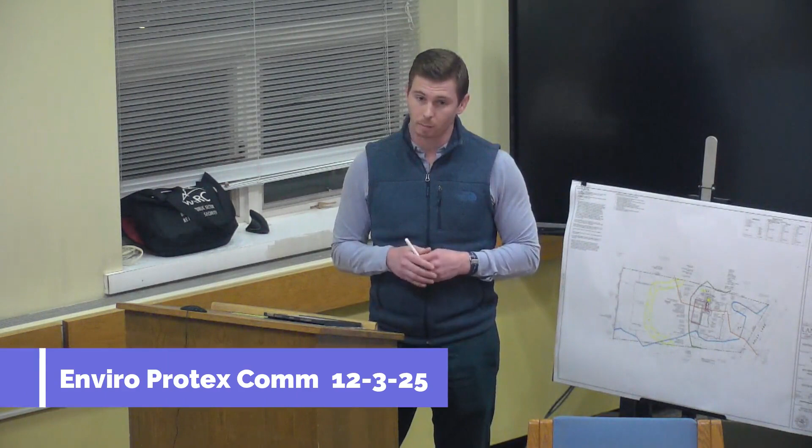That'll allow construction access off the end of the driveway here to come in easily through here, and then ultimately a new underground propane tank will be buried and installed. It'll maintain all of the regulated setbacks from a building code, zoning code perspective. This will allow free access here, and basically they're going to start on this side of the development and then work their way out. Doesn't require any access, certainly not through the wetlands.

There'll be a double row silt fence installed, fully sectioning off those portions of the wetlands throughout construction, and then they'll work their way out. The stockpile was also relocated from the south. If you'll see between the two plans, it's shown in this area here. So what'll happen is they'll come in, dig the excavation for the pool foundation, and stockpile that material in this area, which is just a lawn stepping stone walkway now.

They'll reuse what they need in the backfill, and then that'll all be trucked off the site. So beyond the first, big excavation for the pool foundation, there's really not much for stockpiling that will be on the site. So we think that was a big improvement, as well as tightening this thing up as much as we can.

For drainage, we're providing that drainage all in kind. As Rick mentioned, the previous application before us was moving drainage into the front here and causing more disturbance. We're keeping this all kind of point source treatment in kind. Essentially what you're going to have is just stone and pipe. There'll be perforated PVC pipe, connected up as a manifold. Within that, there's a series of channel drains within the patio that will collect that and recharge it into the ground through the stone and the perforated piping.

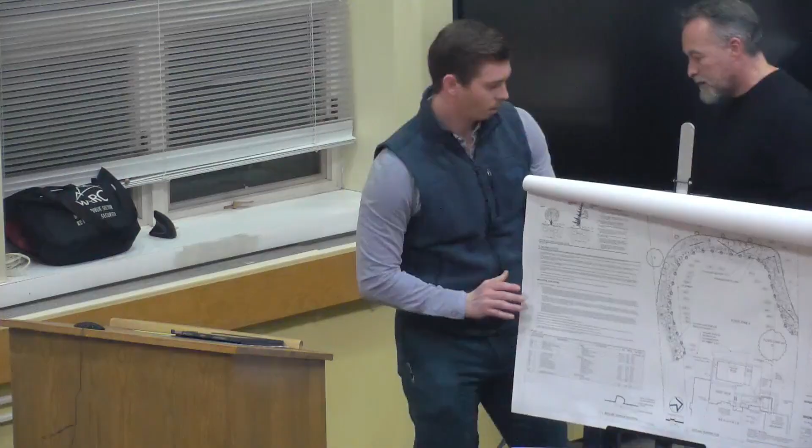Good evening. My name is John DeMail. I'm a landscape architect.

As Kurt and Rick had mentioned, as mitigation, we are taking a huge amount of existing lawn area, roughly about 15 feet wide, and mitigating it with true native plantings, edging that area with boulders placed within 8 feet of each other.

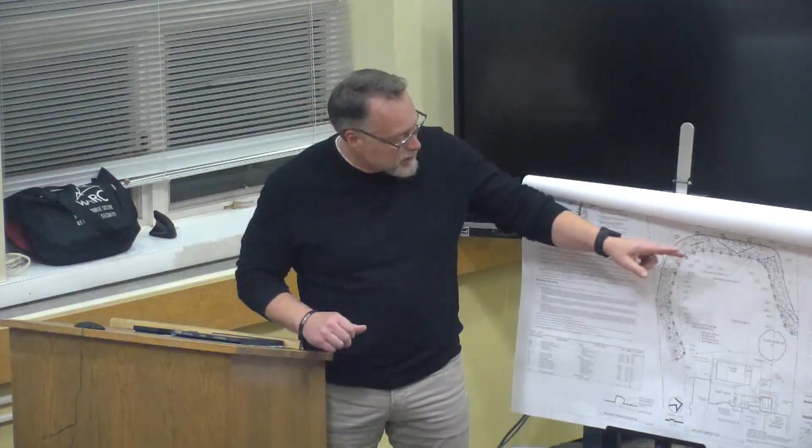The plantings consist of fir, dogwoods, bayberry, viburnum, and basically a lot of the plants that native animals forage on and live within. We included some fir also along the edge here, which might act as screening to the neighbors, but it also adds an evergreen material for the plants, for the animals to live within as well.

Currently the existing lawn area extends all the way to the back side of this dark area, which you're seeing in this drawing here. There were some boulders placed there originally as part of probably the house construction, but now we're extending another 15 feet all along this whole edge, to help mitigate any runoff and water quality, allowing seepage for the plants to filtrate anything going on in there.

We're also noting care of these materials, since there is deer damage that occurs, so what can we do to make it so that the deer aren't going to bother them so much? We also want to make sure that whatever is used doesn't have any synthetics, so we do get into notes regarding that.

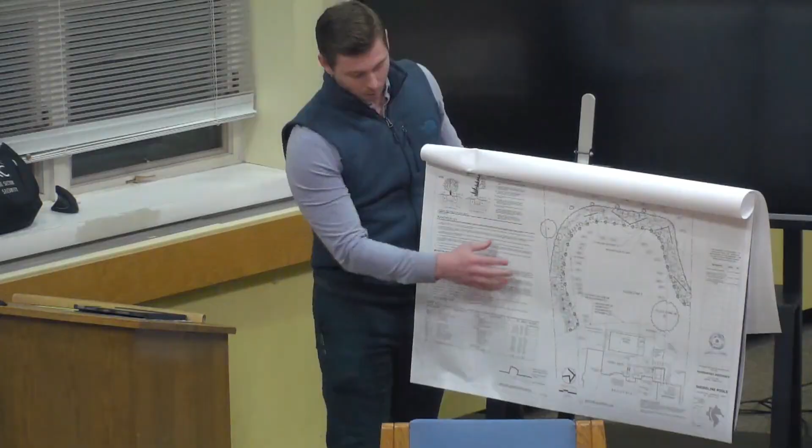Just for reference, for anybody that has not been out there, this is the property here. This is the existing tree line. This is the wetland area now. This is a true lawn area out there. So the addition of this buffer is really adding extra levels of protection to what is not currently there now.

I just want to quickly show the alternatives that we looked at. The first is the plan that was originally submitted by us with our original application. The pink on the edge shows where that grading was. We're about 2 feet or so off of the wetland line. Soil stockpile to the south here, pool equipment also to the south. In our plan now, everything's relocated, all localized within that development footprint.

We also did originally have deer fence located within that planting buffer and within the wetlands. That's now since been removed.

The other alternative, while not one that we prepared, I think it's relevant because it was an application that was in front of your commission for a nearly identical project to what we have here. This was the previous applicant and design engineer's plan. The pink indicating the buffer, the extent of the site work, and it's essentially on the wetland line. I'd say it's within the margin of a foot or so off of that wetland line.

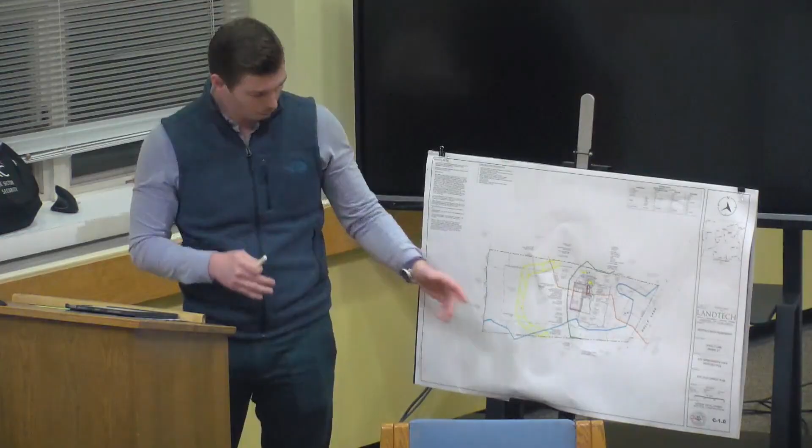Along this edge there will be some small retaining walls—at the highest about knee high, so 18 inches, and then it fades into the grade. It's really just along this edge, so the pool shell will act almost as a retaining wall itself. We could fill it so it would look at grade, but we wanted to pull back any grading, so that's why we elected in this iteration to just leave a small reveal and do the wall.

So you relocated the stockpile from the south side of the pool—I've seen pools excavated, and I know this isn't to scale necessarily, but will that area be sufficient for the material itself, and for what you have to do for the infiltration system?

So those are two different things. This stockpile will be for the soil that's there now—they're going to bring an excavator, dig that, and set the material to the side. Some of that will be reused on site, but most will be taken off. The infiltration itself will be all gravel, so that's an imported material that they'll bring in.

Trucks would presumably park here, and then they'd wheelbarrow it in, since it's not a huge area, placing the stone where they need it, or perhaps with a small excavator, getting it from the stockpile area. There wouldn't be much stockpiling of material after the excavation of the pool foundation itself.

Will the backfilling only be on the east side of the pool? It'll just be in this area—there's not a lot of fill anywhere needed on the site. Within the patio, that's basically all stone underneath.

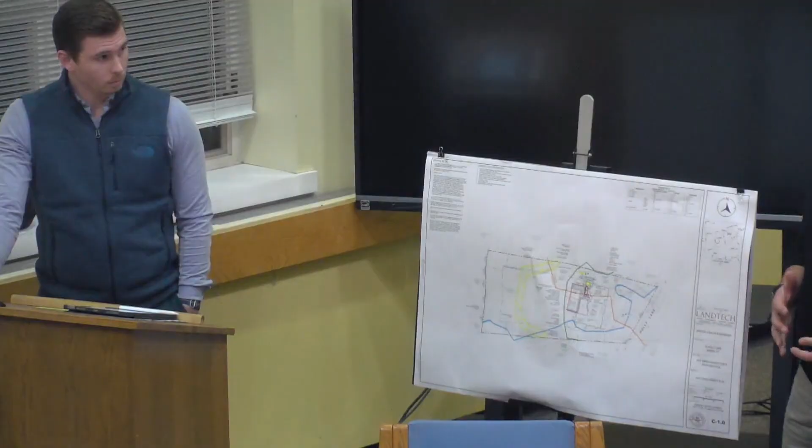Right, where we're doing our mitigation right now, it's just lawn, so where we're talking about maybe going through a little bit in the existing area to see if there are some blatant invasives, I think on the north side. Yeah, so there is a process to it, there's pulling, there's cutting, repeated cuttings, because it keeps coming back every year. So there is going to be some maintenance to ensure it doesn't come back.

Yeah, it's a lovely planting plan. I think you did a really great job with it. Thank you, and the only last thing I would say is I would highly recommend, as you mentioned yourself, the organic land care for the lawn, because it is actually wetland.

I did note no fertilizers are to be used within the wetland area, so that could hopefully cover that entirely, because even some organics have a lot of nitrogen in them, so that could add to some of the water quality issues as well.

Peter? I think it's a wonderful plan, and I think it's a real example of how a plan can evolve to strike the balance of a lot of different issues and interests, so thank you.

Only question is pool safety covers, if you're auto cover, is there no intention of putting a fencing around it at a later date? No. Right now the law doesn't require it, and we're intending to comply with the portion that allows you to not have the fence there.

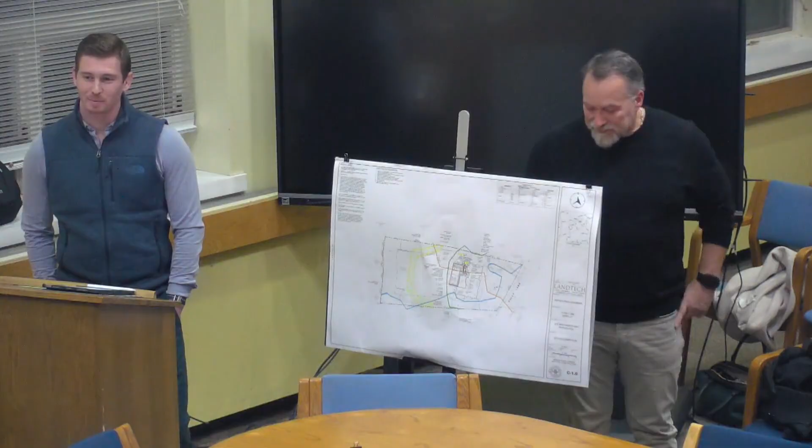Okay, so being no members of the public that would like to speak, can I have a motion to close the public hearing? Yes, I make a motion to close the public hearing for EPC 23-2025, 10 Holly Lane. Second motion to close public hearing 23-2025. All in favor? Okay, Rick, you want to write that one up?

Yep, decision within 35 days. Thank you, Barry. Thank you.

Okay, moving on, EPC 30-2025, PL 25-185, 471 Mansfield Avenue, Missionary Society Inc., AKA the Episcopal Church in Connecticut, the Commons, to demolish an existing residential structure, abandon a septic system, fill and regrade within close proximity to wetlands and watercourses, Stony Brook. The property lies along the west side of Mansfield Avenue, approximately 1,200 feet north of Half Mile Road, and is identified as map number 2, lot number 35. The zone is R2, and it is approximately 14.45 acres.

Mr. Chairman, this application has made its way to the agenda tonight. It is for the demolition of the Missionary Society, the Episcopal Church of Connecticut property located on Mansfield Avenue. There is a residential structure and a garage on the property. The applicant seeks permission to demolish those structures, remove the foundations, and backfill to grade as a precursor to a future development and sale proposal on the property.

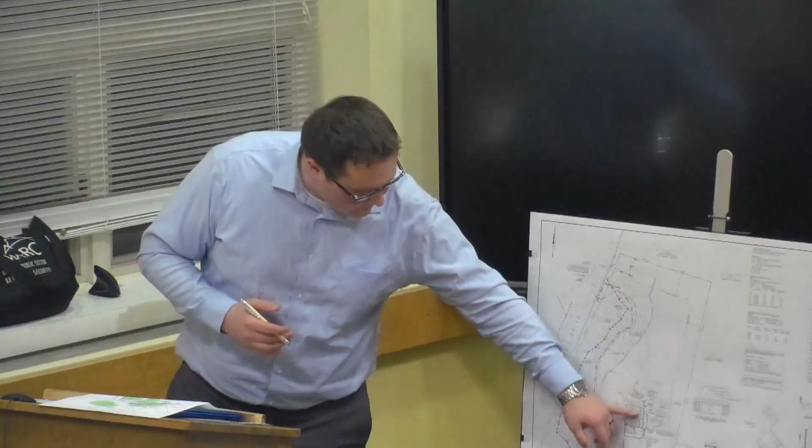With the abandonment of the septic system, this green dash line is approximately where the septic exits the building. Rather than replumb the entire house to the front, the easiest way to do this with the least disturbance would be to come around the side in the upper portion of the property. There's a very narrow walking path there, which was one of Joe Kanish's comments, that there's not a lot of access from this side aside from putting in that sewer line. That's why all of our access for additional activity will come off of Redcoat Pass. It eliminates any chance of adverse impact to the wetlands on this side and gives better site access, although there's not a great amount to begin with.

This portion right here is about 40 feet or so, that's the portion of the sanitary sewer lateral that would have to go through the wetland. The existing lateral runs through here and ties into the main on Andrews Drive. So, like Rick said, we have a planting plan from Alex Mock that repairs the area where it comes through.

We'll make sure, as Rick mentioned, that there's not going to be any draining of the wetlands, though it doesn't really hold a lot of water, I don't know if you saw while you were out there. For the plantings, we agreed with Alex that we don't want anything with a heavy root mass, because that would put pressure on the sewer lines. That's why we're doing herbaceous stuff, mostly ferns native to the wetlands in this area.